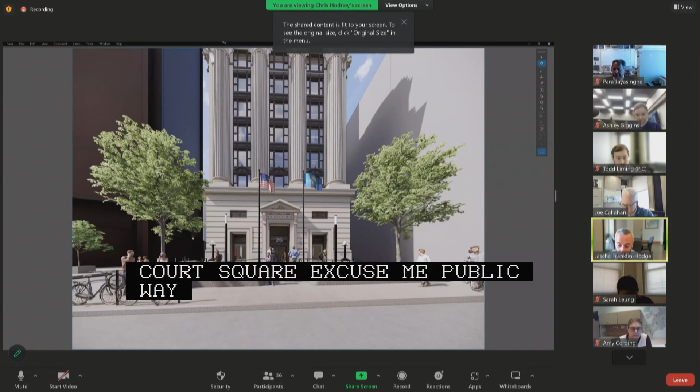So moved. On to our first public hearing of the day, a joint petition by the City of Boston Public Facilities Department and the Boston Redevelopment Authority, DBA Boston Planning and Development Agency, for the vertical discontinuance of a portion of Court Square, Public Way, Boston proper, located at the rear of 26 Court Street, generally northwest of City Hall Avenue, Pie Alley, vertically below the grade of the roadway.

It was new business on January 26th, as shown on a plan entitled City of Boston Public Works Department Engineering Division Vertical Discontinuance, Court Square, Downtown, one sheet dated August 25th, 2022. Would the proponents please introduce themselves, their affiliations, give a brief overview of the project, and then talk us through this specific item that you're proposing.

Good morning, Commissioners. I'm Gregory Rideout with the City of Boston Public Facilities Department. Here with me today is Chris Hodney from Nitsch Engineering, as well as representatives from Cambridge 7. On behalf of the city, we also have the Deputy Chief of Operations, Keith Williams, the Deputy Director of Public Facilities Department, Carlton Jones, and the Assistant Director of the Public Facilities Department, Dana DiMatteo. Public Facilities Department and our architect, Cambridge 7, and Nitsch Engineering are excited about making site improvements that highlight good urban design, accessibility, and lighting.

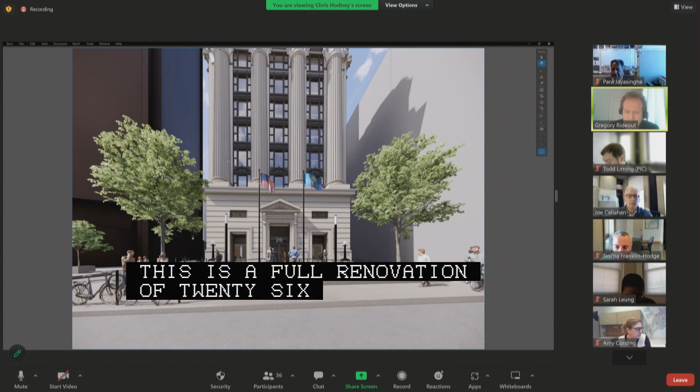The project is now providing a fully accessible pathway around the building. This is a full renovation of 26 Court Street, incorporating the offices of the Public Facilities Department, the Mayor's Office of Housing, and additional departments. The first floor features a welcoming lobby, constituent interaction spaces, a bid room, and a large public meeting room. We would like to thank our partners in departments across the city and in the downtown Boston Business Improvement District, all of whose input has made this an even better project.

Today the Boston Public Facilities Department comes before you with three requests. The first is regarding a vertical discontinuance, for which we are requesting approval. The second is regarding a pedestrian easement, for which we are requesting conditional approval. The third is some specific repairs, for which we are also requesting conditional approval. The approval and conditional approvals will allow the project team to obtain a long-form building project permit in a timely manner and allow us to maintain the construction schedule.

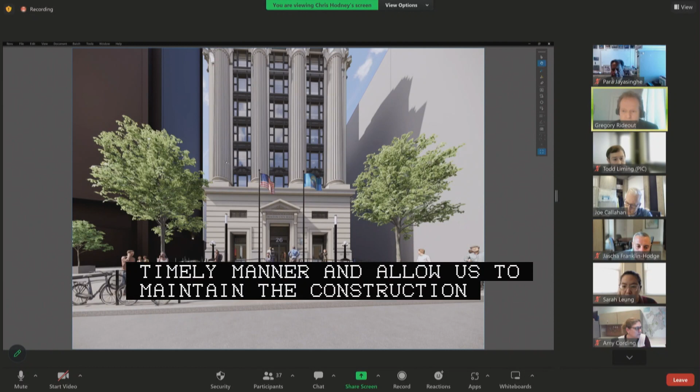Thank you, Commissioners, and we'll now turn it over to Mr. Hodney. So thanks, Greg. Morning, Chris Hodney with Nitsch Engineering, project manager on the project. So this is just a rendering showing the front of the building. The first action item today is this vertical discontinuance. Nothing has changed in this plan since we previously presented it at the prior hearing. There's an existing tunnel underneath Court Square, which connects Old City Hall, this building on the left, with the 26 Court Street building, which is our project.

It's been there for a number of years, but it was never actually discontinued out of the right-of-way, so this is an attempt to clean up this condition. I'll open up to questions.

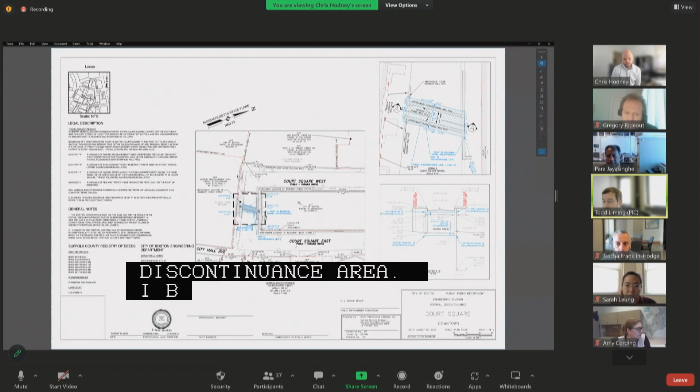Commissioners, any questions? Are there no utility easements or any other easements within that part? Todd, are there any private utility easements or anything within the area? No, not within the discontinuance area. I believe there might be some old utility lines that connect the two buildings, but those are all privately maintained. They might even be abandoned, I'm not sure, but no public utilities are impacted by this. Thank you, sir.

Any other questions from members of the commission? PIC staff or members of the public? We're all set with this, thank you.

All right, seeing no raised hands, do I hear a motion to approve public hearing number 1? I'll make a motion to approve a joint petition by the City of Boston Public Facilities Department and the Boston Redevelopment Authority for the vertical discontinuance of a portion of Court Square as read into the record by the chair.

Second. All in favor? Aye. Aye. Aye. Any opposed or abstain? I abstain due to direct involvement in the project. All right, well, I think we have a quorum, so the public hearing item passes, so moved.

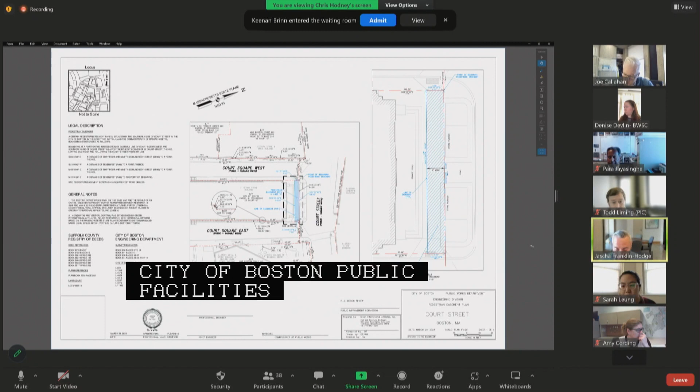On to public hearing number 2 on a petition by the City of Boston Public Facilities Department for the acceptance of a pedestrian easement adjacent to Court Street Public Way, Boston proper, located at address number 26 between Court Square East and Court Square West. New business from January 26th as shown on a plan entitled City of Boston Public Works Department, Engineering Division, Pedestrian Easement Plan, Court Street, Boston, one sheet dated March 29th, 2023.

Would the presenters please reintroduce themselves and their affiliations and then walk us through this business item. So good morning again, Chris Hodney, Project Manager with Nitsch Engineering, joined by Greg Rideout with the Public Facilities Department, as well as some members of the Cambridge 7, the architects.

This plan represents a pedestrian easement. This was actually requested at the prior hearing. So this pedestrian easement is along Court Street. It includes the 2 ramps which lead up to the main entrance. So you walk from the sidewalk up the ramps to get in, and this is just including those in the pedestrian easement.

Any questions or comments from the commission? PIC staff, members of the public? No, we appreciate the project team's quick turnaround on this plan. We do have some probably minor comments, but we can work on those offline before mylar plans are submitted. All right,

Seeing no other comments, do I hear a motion to approve public hearing number 2? I'll make a motion to approve a petition by the City of Boston Public Facilities Department for the acceptance of a pedestrian easement adjacent to Court Street as read into the record by the chair.

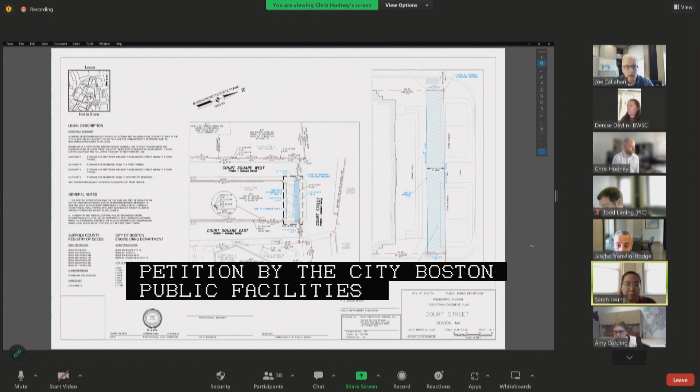Second. All in favor? Aye. Aye. Aye. Aye. Any opposed or abstain? I abstain due to direct involvement in the project.

All right, so moved. On to public hearing number 3 on a petition by the City of Boston Public Facilities Department for the making of specific repairs within the following public ways in Boston proper, consisting of curb realignment, roadway and sidewalk reconstruction, as well as new and relocated pedestrian ramps, street lighting infrastructure, storm drain infrastructure, hydrants, groundwater recharge wells, bike racks, bollards, electric vehicle charging stations, a raised crosswalk, and a rebuilt stairway.

Court Street at address number 26, generally between Washington Street and Tremont Street, Court Square southwest of Court Street. New business on January 26th as shown on a set of plans entitled City of Boston Public Works Department, Engineering Division, Specific Repairs Plan, Court Square, 26 Court Street, Boston, 5 sheets dated August 2022.

Would petitioners please reintroduce themselves and walk us through the details of this action? So good morning, Chris Hodney, Project Manager at Nitsch Engineering, joined by Greg Rideout of the Public Facilities Department, as well as some members of the Cambridge 7, the architects.

So this plan before you shows the proposed improvements, which are essentially the entire perimeter around the 26 Court Street building, which is in the center here. In addition to the items that you listed off, Mr. Chair,

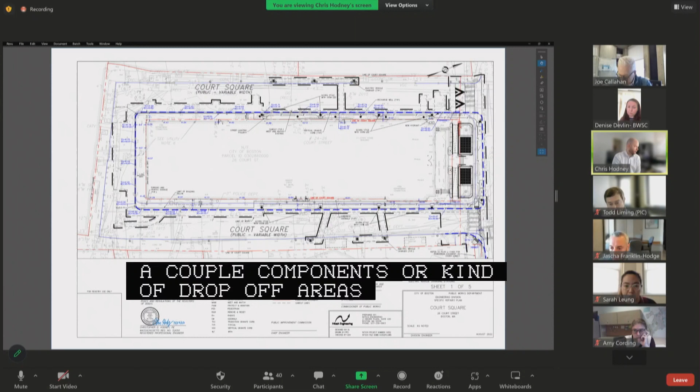We've made some revisions since the prior hearing. So those revisions include revising the curb on Court Square East. So we previously had a couple of bump outs or kind of drop off areas. I guess they were actually parking, but so some bump outs, which we've just straightened the curb out and eliminated parking on this side altogether. This allowed us to provide an ADA accessible sidewalk, as well as room for street lighting infrastructure.

This has been coordinated between BTD, Disabilities Commission, and street lighting over the past month or so. So I think we're in a pretty good place with where the sidewalk has ended up on this side of the street. We've also made some revisions just to street lighting around other parts of the building as well.

We originally had a single street light in the middle. This has been revised to have one on either side of the building, and then just mirroring on each side along Court Square West. And then just a couple of more minor items. There was a request to better show the extent of the foundation for the basement as it extends out below the sidewalk, below the building.

So we darkened that here, calling out the limits of building below. You can see that it extends out beneath the sidewalk on Court Square East, Court Square South, and Court Square West. We've also called out, at staff request, the existing pedestrian easement in front of 1 Boston Place, which is running through this. This is showing the front.

We've really made minor changes here, just the street lights more than anything else, and calling out the existing pedestrian easement. You can also note, for context, the pedestrian easement which was just approved contains the two ramps leading up to the building. So I'll open it up to any questions you might have.

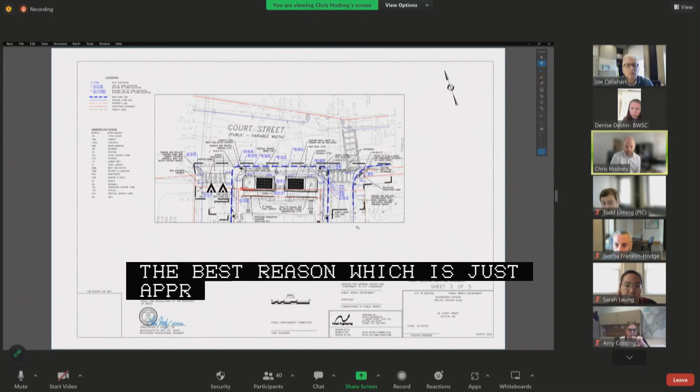Commissioners? Good morning. Okay, Amy. I know we recently moved all that parking on the other side, and part of that was discussion about the potential for a crosswalk at the back of this building, Court Square South. We would need ramps if there's going to be a crosswalk there. I want it where Sarah wants it, but if we're going to have a crosswalk at the back of the building, we need some ramps.

Gregory Rideout, Boston Public Facilities Department. Public Facilities Department had a conversation with Commissioner McCosh and her team, and they have waived the requirement for a crosswalk at the south. Sarah Leung can address that more specifically.

Yes, in conversation with Commissioner McCosh, we wanted to prioritize the sidewalk improvements here and maybe revisit to allow for a crosswalk in the future. But for this project and the timeline schedule, we did want to prioritize these sidewalk improvements. We want to thank the project team for coordinating with our office as well as other city departments to get an accessible sidewalk on the building side as well.

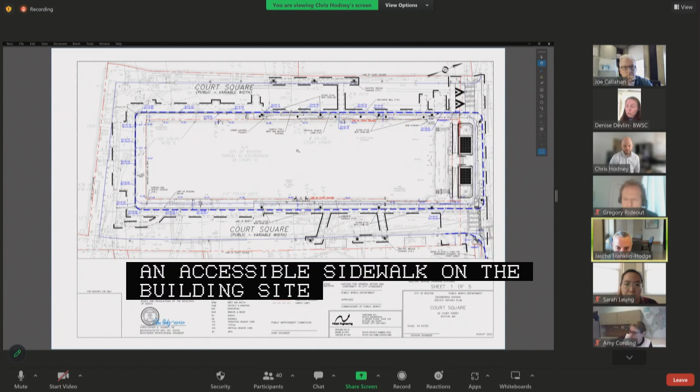Commissioners, other questions, comments? Oh yes, just a comment on the drainage. On the final plans, if you could show any proposed drainage improvements, just the structures or any kind of abandonment of structures like catch basins, anything in the public way, that'd be great. Thank you.

Commissioners? I will say first, appreciation on behalf of the Street Lighting Division to the project team for working through the various lighting scenarios for Court Square with us. We were very happy with how this landed, and the ability to use our standard street lighting infrastructure in this location is much appreciated.

Question about maintenance. What is the expectation for which of these project elements will be maintained by the proponents rather than by the Public Works Department? And where are we in terms of establishing an LMI for the maintenance responsibility of anything that will be maintained by the Public Facilities Department?

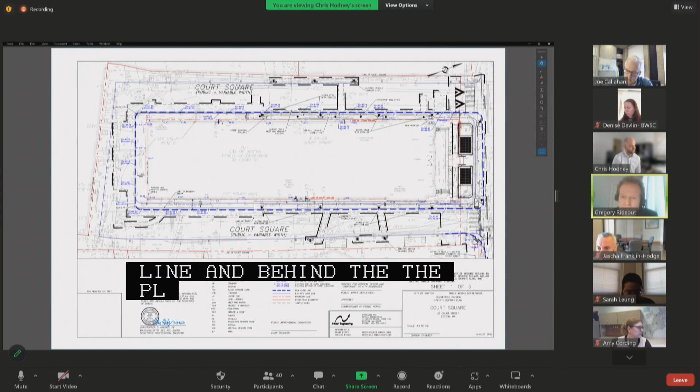Gregory Rideout, Boston Public Facilities Department. The items that fall within the building property will be the responsibility of the Property Management Department to maintain. In the front of the building, the line behind the planters is the property line, with the pedestrian easement there for the ramp, so anything falling behind that line of the planters. As for the stairs between the planters, I anticipate those will also be maintained by the Property Management Department as part of an agreement. The lighting we are placing on the facade of our building will also be maintained by Property Management.

As for the sidewalk that is outboard of the planters at Court Street, that will be maintained by Public Works. As for the sidewalk around the building, I believe it will depend on whether or not there is a hollow sidewalk underneath. If there's a hollow sidewalk underneath, that will fall under the responsibility of the owner or Property Management. Where there is not a hollow sidewalk underneath and it is within the public way, it will fall within the responsibility of Public Works. That is the Public Facilities Department's understanding, and I'll leave it to Todd if he wants to add to that.

Can I ask also about the bollards and EV chargers? On the EV chargers, there has been a fair amount of coordination between the Environment Department, Fleet Management at Public Works, Property Management at Public Facilities, and also the Budget Office.

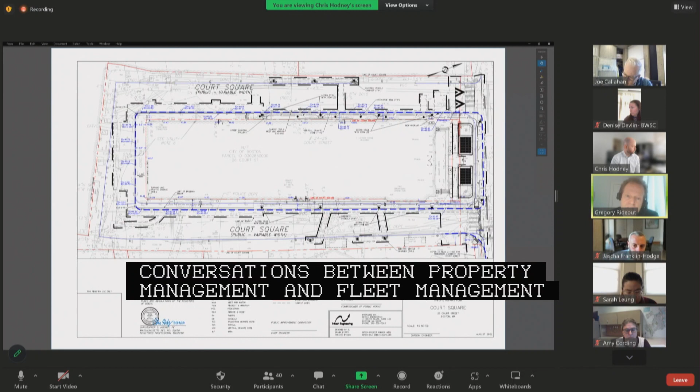As far as the maintenance of the electric vehicle chargers, I believe there needs to be further conversation between Property Management and Fleet Management as to the precise responsibility for managing them. However, there is interdepartmental agreement that these chargers will be for the exclusive use of city-owned vehicles to help meet the city's climate goals.

Got it. And the recharge wells? The recharge wells are part of the city's review with the Boston Water and Sewer Commission, and Nitsch Engineering has coordinated a site plan review and approval with them. The recharge wells feed into a tank in the basement of 26 Court Street. I believe maintenance falls upon the owner, but I'll let Chris Hodney speak to that. Yeah, typically that would be ownership responsibility, so I'd anticipate that's 26 Court Street property management's responsibility.

So we'll continue to look for future conversation on the EV chargers, given that they are an asset for which there are a lot of stakeholders, as you correctly noted. Happy to be part of finalizing that conversation about responsibilities there.

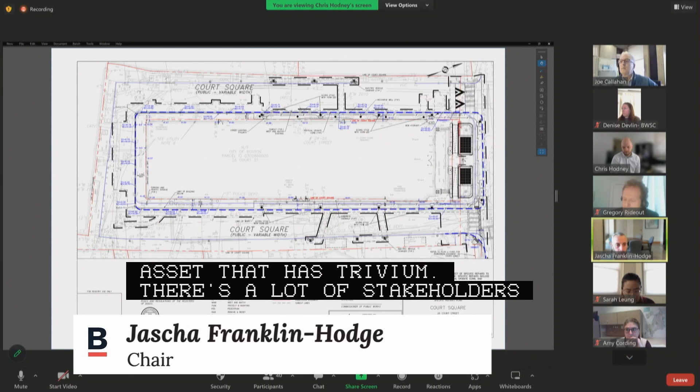Todd, is there anything else from an LMI perspective that you wanted to make sure we covered? No, I think that was it.

The bollards, I think, probably belong to Property Management. Those don't look like standard Public Works bollards, but everything else that Greg and Chris mentioned seems to fit the LMI. I believe Chris added the extents of the hollow sidewalks to the PIC plan, so it should be pretty easy to recognize which sidewalks are the maintenance responsibility of the project versus Public Works. That should be fine. Great.

Any last questions, comments from commissioners? PIC staff, members of the public?

Mr. Chairman, if I may. Yeah, of course, go right ahead, Keith. Keith Williams, Deputy Chief of Operations, Operations Cabinet, Mayor's Office. On behalf of Chief Dion Irish, I'd like to express strong support for these petitions by PFD. As you know, 26 Court Street is a high priority project for the Cabinet administration, and a lot of hard work and diligence has gone into this. So on behalf of the chief, I'd like to speak in support of these petitions. Thank you.

Thank you, Keith. Todd, any further final comments? No, just want to thank the project team. There was a lot of coordination that went into this. We appreciate their diligence. Yes, indeed, I will echo that.

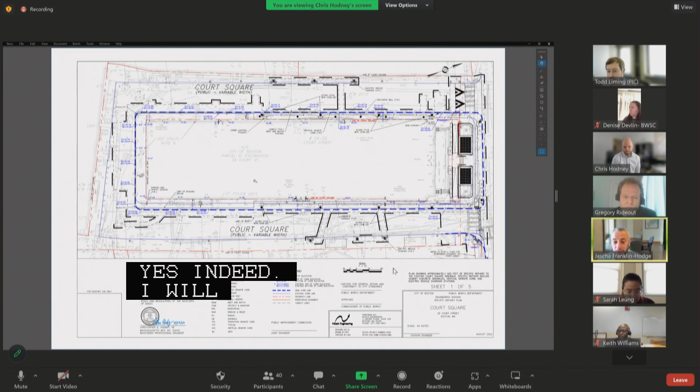So with that, do I hear a motion to approve public hearing number 3? I'll make a motion to approve a petition by the City of Boston Public Facilities Department for the making of specific repairs within Court Street and Court Squares, read into the record by the chair. Second. All in favor? Aye. Aye. One abstention for the record, just due to direct involvement with the project. Got it, no other abstentions or votes in opposition? All right, so moved. Thank you very much. Thank you. Public Facilities Department would like to thank the PIC staff and the commissioners.

Thank you. Thanks, Greg. All right, on to public hearing number 4, on a petition by the City of Boston Public Works Department for the making of specific repairs within the following public ways in Dorchester, consisting of curb realignment, roadway and sidewalk reconstruction, new and relocated pedestrian ramps, specialty pavement, street lighting infrastructure, storm drain infrastructure, street trees, and driveway curb cuts: River Street generally between Southmere Road and Meadowbank Avenue, Leah Haven Road between River Street and Meadowbank Avenue, Ledgebrook Road between River Street and Meadowbank Avenue from River Street to a point west of Ledgebrook Road, Southmere Road between River Street and Ledgebrook Road, and Newcroft Circle north of River Street.

This was new business on March 16th, 2023, as shown on a set of plans entitled City of Boston Public Works Department Engineering Division Specific Repairs Plans, River Street Neighborhood, Leah Haven Road, Ledgebrook Road, Meadowbank Avenue, Southmere Road, Newcroft Circle, Mattapan, 11 sheets dated March 30th, 2023.

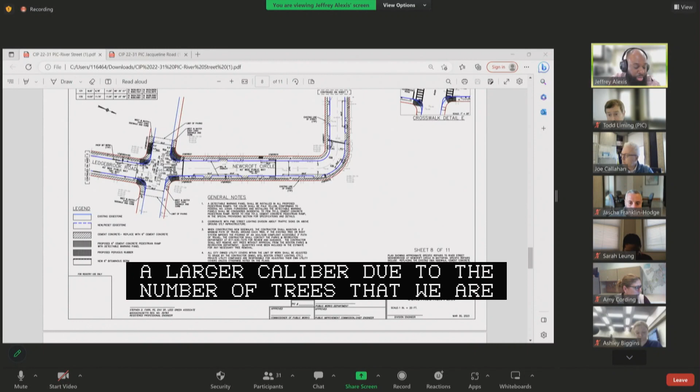There was a request to propose a larger caliper due to the number of dead trees that we were removing as part of this project. We have been coordinating with the Parks Department. The request was to propose a larger caliper, whether it be 3 inches or 4 inches.

In regards to that, we did reach out to Parks, and they did have some concerns in regards to proposing a larger caliper within the 3 foot or 3.5 foot grass strip. The 2.5 inch caliper tree root ball is roughly 26 to 28 inches in diameter, which would only leave approximately 5 inches of space on each side for installation into the planting strip.

And if they were to install a 3-inch caliper tree, the root ball would average 36 inches in diameter, which wouldn't leave enough room for the plant to be properly planted in those grass strips. So they did have concerns in regards to that, which is why they felt that proposing a 2.5-inch caliper would be the largest we should propose as part of these improvements.

The other issue that was raised was in regards to the porous asphalt berm. The Parks Department also felt that there wasn't much benefit to using the porous asphalt berm compared to a standard asphalt berm for this application, as they felt the water would never have the ability to permeate through the berm if it was running down the curb line to drain anyway.

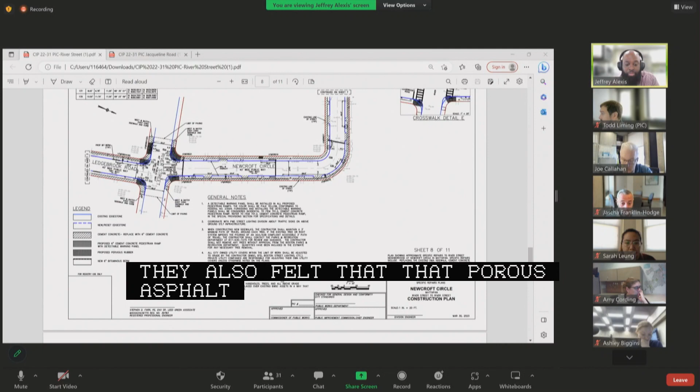We also reached out to our design consultant to get their opinion on whether we should propose this or not. They also felt there weren't really much benefits to proposing the porous asphalt at the curb line. Porous pavement provides excellent infiltration when used as a horizontal surface where water can infiltrate vertically via gravity. There were concerns about the permeability of the porous berm being reduced.

Due to gutter line collection of road sand, salt, and other debris that continuously collects in the gutter, there was also a concern about the lack of strength and durability of a porous pavement berm used for curb. Because of the void structure and permeability, the asphalt is severely weakened, so with plows hitting against it, they had concerns that the durability wouldn't be adequate for us to propose it for this application.

I think that's the last thing we had in regards to the trees. In regards to these plans, for PIC, they changed slightly, but the improvements we're proposing as part of this project are not changing. We are maintaining all the improvements.

The last issue requested as part of these improvements was the crossings we're proposing at Ledgebrook, the new crossings across River Street. This is one of them here, and the other is at Meadowbank Avenue. We reached out to BTD to figure out what we can do to enhance these crossings, but they mentioned that proposing any enhancements would require significant improvements to River Street, which goes beyond the scope of this project.

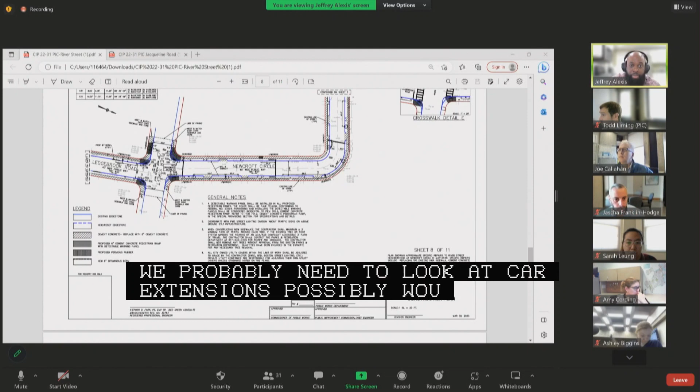We probably need to look at curb extensions, possibly if we'd want to propose an RRFB, the minimum would be to propose a curb extension along this corridor. We're happy to take a look at River Street as a whole in a holistic view in the future, but as part of this project, which is mainly focused on keeping residential streets in a state of good repair and providing that access, they ultimately determined that crosswalk signs were sufficient at this time.

Any questions on this one? Commissioners, questions? PIC staff, members of the public? No, we're all set. Thank you, Jeff, for your plan updates. Thank you very much for addressing all those issues from the last hearing.

Hearing no other questions or comments, do I hear a motion to approve public hearing number 4? I make a motion to approve a petition by the City of Boston Public Works Department for the making of specific repairs in River Street, Leah Haven Road, Ledgebrook Road, Meadowbank Avenue, Southmere Road, and Newcroft Circle, as read into the record by the chair. Second.

All in favor? Aye. Aye. Aye. Any opposed or abstain? So moved. Thank you very much. And thank you, Jeff.

On to public hearing number 5, on a petition by the City of Boston Public Works Department for the making of specific repairs within the following public ways in Jamaica Plain, consisting of curb realignment, roadway and sidewalk reconstruction, as well as new and relocated pedestrian ramps, street lighting infrastructure, and driveway curb cuts: Jacqueline Road between Ansonia Road and Birchland Avenue, Ansonia Road generally at Jacqueline Road, Birchland Avenue generally at Jacqueline Road. New business on March 16th, as shown on a set of plans entitled City of Boston Public Works Department Engineering Division, Specific Repairs Plans, Jacqueline Road, West Roxbury, 3 sheets dated March 16th, 2023.

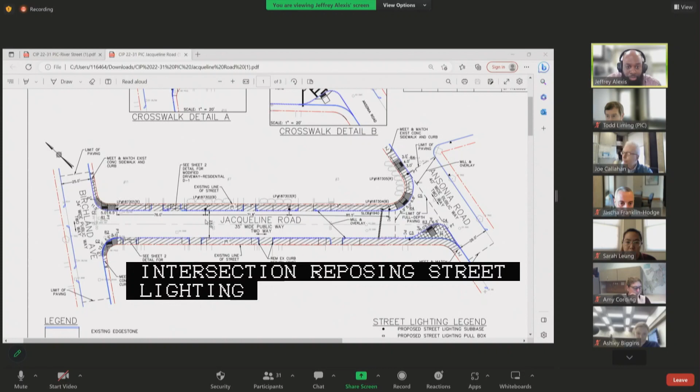No changes or updates were made to these plans as of new business. We are maintaining our existing design. I'm proposing a crossing along Jacqueline Road, as well as improved crossings at the Ansonia Road intersection. We're proposing street lighting as part of this project. Jacqueline Road is a substandard 23-foot roadway. We are restricting parking on the northern side, which is essentially something the residents were doing anyway. They were just self-regulating because they didn't have the ability to go up and down the street and pass without parking only on one side.

One of the questions we received as part of new business was in regards to Birchland Ave and the improvements that street also needs. We are looking at Birchland Ave, and we've added it to our backlog in terms of reconstruction for this program because it's a residential street, and we'll be looking at prioritizing it in our program in the future. But no other updates on Jacqueline Road.

Thank you. Any questions? Thank you, Jeff. Commissioners? PIC staff, members of the public? We're all set. All right, excellent.

Do I hear a motion to approve public hearing number 5? I'll make a motion to approve a petition by the City of Boston Public Works Department for the making of specific repairs in Jacqueline Road, Ansonia Road, and Birchland Avenue as read into the record by the chair. Second. All in favor? Aye. Aye. Aye. Any opposed or abstain?

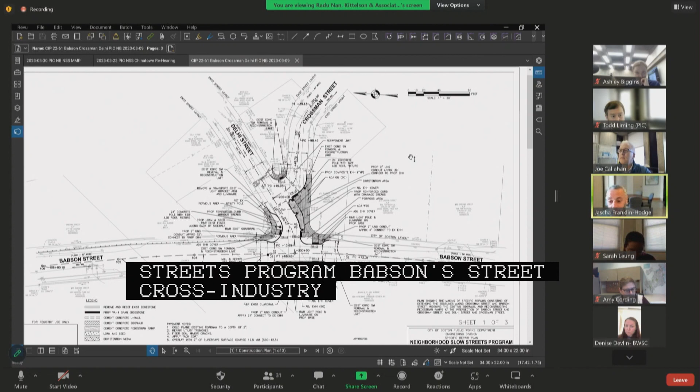This is new business from March 16th, as shown on a set of plans entitled City of Boston Public Works Department Engineering Division, Specific Repair Plan, Neighborhood Slow Streets Program, Babson Street, Crossman Street, Delhi Street, Mattapan, 3 sheets dated March 3rd, 2023. Proponents, please introduce yourselves, your affiliations, give us a brief overview of the scope of the project and any updates since your last hearing.

Good morning, Chair and members of the Commission. I'm Radu Nan with Kittelson Associates, supporting Boston BTD and Public Works Department. In front of you is the plan for specific repairs to improve the accessibility and walking paths for people in the neighborhood just east of this intersection between Crossman and Babson.

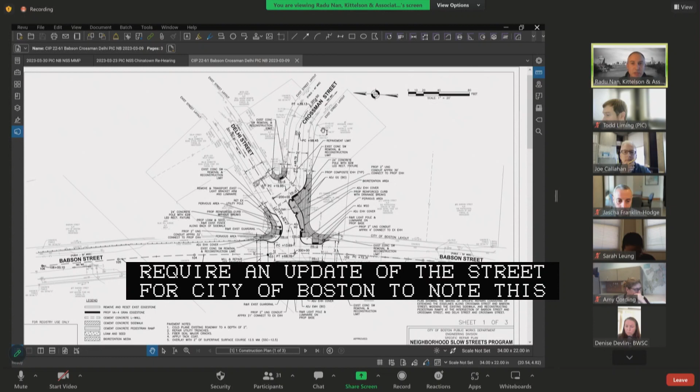The realignment of the edge lines reconfigures the intersection for Crossman Street to tee into Delhi Street, and then Delhi Street continuing to Babson Street. This will require an update of the street book for City of Boston to note this new configuration. The reconfiguration provides a more predictable travel pattern from Crossman Street to Babson Street.

Crossman Street today is required to stop for traffic approaching from Delhi, and then further down, Delhi Street traffic stops at Babson. The addition of the pedestrian ramps provides enhanced visibility and a clear crossing of Babson Street at Delhi Street, or Crossman Street today.

An additional space within the intersection that is not used for pedestrian travel path is being built as pervious, or as a bioswale, to allow stormwater to infiltrate or travel through before rejoining the existing flow patterns that use the existing catch basins along Crossman Street and Babson Street.

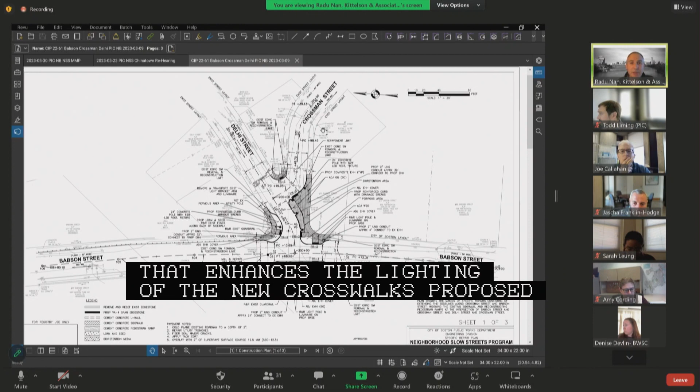In addition to the sidewalk, pedestrian ramps, and edgeline improvements, the project adds new streetlights, or relocates them, in a position that enhances the lighting of the new crosswalks proposed across Delhi Street and Babson Street. No changes have been made to these plans from the plans that were shown in the new business hearing. With that, I'll entertain any questions.

Thanks, Radu. Questions from commissioners? Good morning, Radu. We had a concern out in front of 72 Babson Street. You have the adjusted sewer manhole. We have a concern with that manhole being in the bio retention area. One of the details that was sent in the previous submittal, the cover doesn't look like it's flush with the surface. So I don't know if we're okay with the petition going through today, but maybe after the meeting we can have a conversation and discussion about that.

We'll be happy to, yes. Okay, thank you.

Any other questions or comments from commissioners, PIC staff, or members of the public? All set. All right, do I hear a motion to approve public hearing number 6?

I'll make a motion to approve a joint petition by the City of Boston Transportation Department and the City of Boston Public Works Department for the making of specific repairs in Babson Street, Crossman Street, and Delhi Street as written in the record by the chair. Second. All in favor? Aye. Aye. Any opposed or abstain? So moved. Thank you very much.

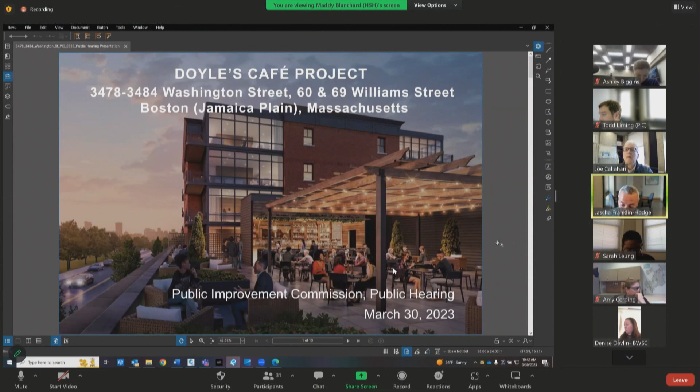Thank you. All right, now that we are through the City of Boston portion of our public hearing agenda, we can go on to public hearing number 7 on a petition by Watermark Development Incorporated for the acceptance of pedestrian easements adjacent to the following public ways in Jamaica Plain: Gartland Street on its southwesterly side at the side of 3478 to 3484 Washington Street, southeast of Washington Street; William Street on its southwesterly side at address number 69, southeast of Meehan Street; Meehan Street on its easterly side, south of William Street.

This was new business on March 16th, as shown on 2 plans entitled City of Boston Public Works Department Engineering Division Pedestrian Easement Plan, Gartland Street, Jamaica Plain, 1 sheet dated March 10th, 2023, and City of Boston Public Works Department Engineering Division Pedestrian Easement Plan, William Street and Meehan Street, Jamaica Plain, 1 sheet dated March 10th, 2023. Would the proponents please introduce themselves, give us a brief reintroduction to the scope of work being proposed here, and then walk us through this specific PICA action.

Good morning. James Downing, Howard Stein Hudson. We're the project engineers. I'm joined this morning by Lee Goodman from Watermark Development, who is the petitioner, and also by Maddy Blanchard from Howard Stein Hudson.

Here to present the plans associated with the 3478 Washington Street development, and also the 60 and 69 William Street project. Here's an aerial overview of the project.

There will be a total of 3 buildings built in 2 areas. The first 2 buildings will be built on Washington Street and Williams, between Gartland Street and William Street. The 3rd building will be built at the intersection of Meehan and William Street. Next slide. Here's an aerial view of the 3 buildings laid out.

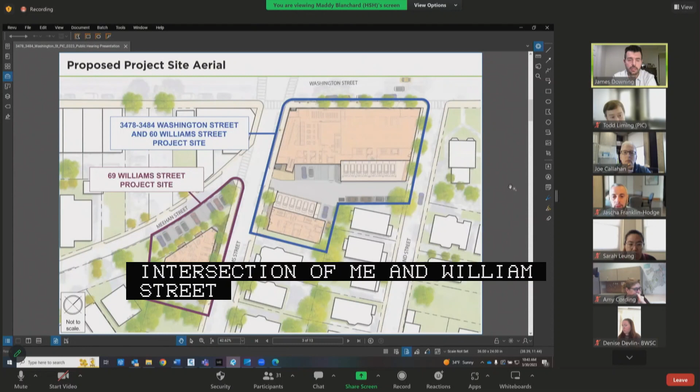The 3478 Washington Street building will have the Doyle's Cafe and also a grocery store on the ground level, above which there will be a 4-story residential building consisting of 16 units. There will also be some off-street covered parking in the rear for restaurant cores and for shoppers.

To the south of that building, at 60 William Street, is a 4-story residential building that will have 7 units, with off-street parking for that building as well. Lastly, the 3rd building is located across William Street at the intersection of William and Meehan, a 3-story residential building with 6 units and off-street parking.

Next slide. We've got a couple of sites here showing some of the existing conditions and some of the proposed renderings for the buildings. This is the existing Doyle's Cafe at the intersection of Washington and Williams. Here's the proposed development. Again, you can see Doyle's Cafe on the ground floor with that urban grocery store, above which we have the 4-story residential building.

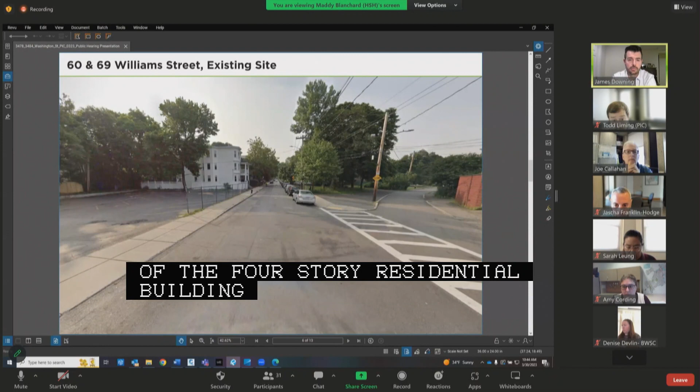And then this is the view down William Street. The development at 60 Williams will be built on the left-hand side in that vacant parking lot. And then on the right-hand side, 69 William Street will be built at the corner between that utility pole and that silver car. Again, here's a rendering of those two buildings.

On the left-hand side, that gray-blue building with the 6 balconies is the 60 William Street building. Then across the street on the right-hand side, the 3-story red brick building is the 69 William Street project.

As a result of the project, the applicant is seeking to grant the City of Boston a pedestrian easement along Gartland Street, associated with the Washington Street development. The pedestrian easement would extend for approximately 122 feet in a southerly direction from Washington Street, approximately 3.5 feet wide, for a total area of 429 square feet. Next slide, please.

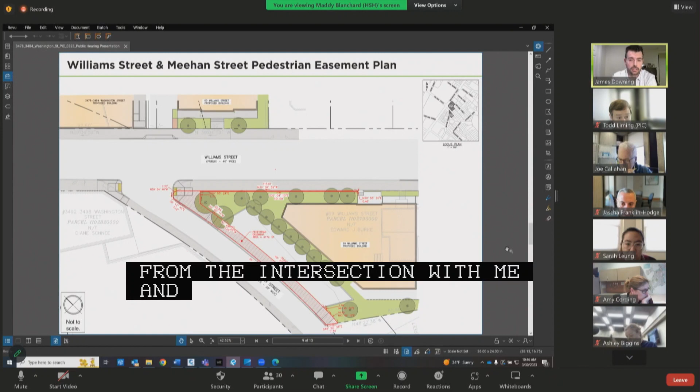I'm happy to answer any questions the commission members or public may have.

Thank you very much, James. Have there been any modifications to these plans since your prior hearing? There have been no modifications to these plans.

Excellent. Commissioners, any questions or comments? PIC staff, members of the public? No, we're good with this.

Thank you. All right. Do I hear a motion to approve public hearing number 7? Make a motion to approve a petition by Watermark Development for the acceptance of pedestrian easements adjacent to Gartland Street, William Street, and Meehan Street as read in the record by the chair. Second. All in favor? Aye. Aye. Aye. Any opposed or abstain?

So moved. On to public hearing number 8, on a petition by Watermark Development Incorporated for the making of specific repairs within the following public ways in Jamaica Plain, consisting of curb realignment, sidewalk reconstruction with structural soil, as well as new and relocated pedestrian ramps, specialty pavement, traffic signal infrastructure, street lighting infrastructure, street trees, landscaping, and driveway curb cuts. Washington Street, generally at address numbers 3478 and 3484 between William Street and Gartland Street. Gartland Street southeast of Washington Street, William Street generally at address numbers 60 and 69 from Washington Street to a point southeast of Meehan Street south of William Street.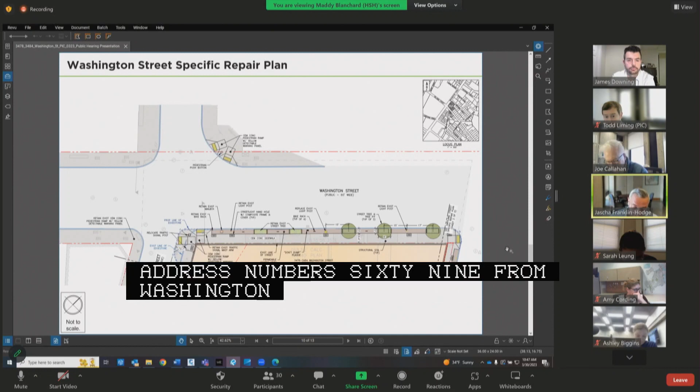New business from March 16th, as shown on a set of plans entitled City of Boston Public Works Department Engineering Division Specific Repairs Plan, Washington Street, William Street, Meehan Street, and Gartland Street, 3478 to 3484 Washington Street, 60 William Street, and 69 William Street, Jamaica Plain, 5 sheets dated March 10th, 2023. Would the proponents please reintroduce themselves, give us a brief reintroduction to this specific action, and any updates on questions you heard or changes to the plan since last meeting.

Morning. James Downing, Howard Stein Hudson, project engineers, joined by Lee Goodman from Watermark Development, the petitioner, and also by Maddy Blanchard from Howard Stein Hudson, here to present the specific repair plans associated with the development at 3478 Washington Street and 60 and 69 William Street.

As a result of the project at 3478 Washington Street, we put together a specific repair plan. Improvements within the public right-of-way will include separation of the apex ramp on the corner of William and Washington Street, relocation of an existing traffic signal post, and along the frontage of the building, the planting of 3 new street trees, bike racks, and reconstruction of a brand new cement concrete sidewalk.

Across the street, the proponent is also seeking to separate the apex ramp on that side of the street and incorporate a new pedestrian push button. Next slide, please.

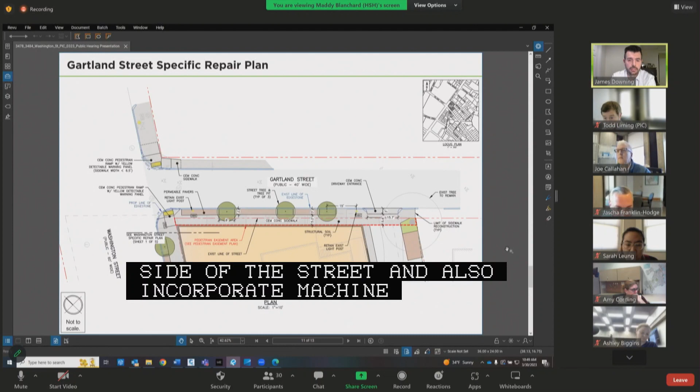Similarly, as a result of the proposed project, the applicant is seeking to make improvements within Gartland Street. These would include curb realignment, ramp reconstruction, installation of 3 new street trees, and some porous pavers in the furnishing zone, and modification to an existing curb cut.

Lastly, as a result of the project at 69 William Street, the applicant is seeking to make modifications on the public right-of-way that would include new curb realignment, the reconstruction of 2 new pedestrian ramps, and the widening of the sidewalk along the south side of William Street. With that, happy to answer any questions the commission or public may have.

Thank you, James. I believe there was a question from the last hearing about the potential for introducing more permeable or green surfaces within the public right-of-way here. I'm wondering if you have any updates about that, and whether there's been any ability to identify places where that might be appropriate.

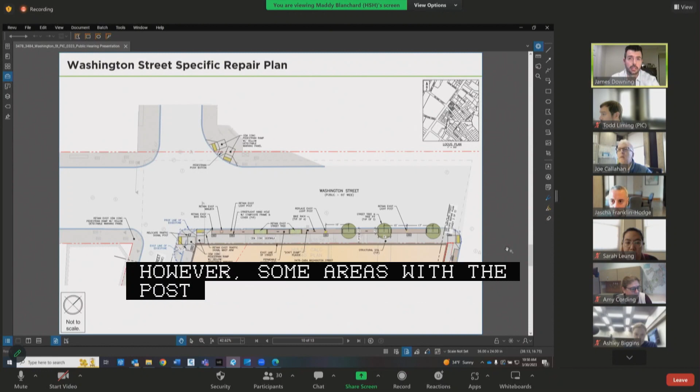Yes, that is correct. We did receive some comments and have looked at some of them. We did not agree with all of them. However, in some areas where porous pavers are currently shown on this plan for Washington Street, we are looking to set up a meeting early next week with Kate England, the PIC staff, and the design team and landscape architect to see if we can install, or swap out some of the porous pavers for some green infrastructure.

Okay, excellent. So it would not affect the dimensions or anything like that associated with the specific repair plan. All right, excellent. Appreciate that willingness to continue that line of conversation, and certainly the PIC can accept those kinds of minor modifications after a vote.

So, commissioners, other comments or questions? PIC staff, members of the public — no, we can be part of those conversations with Kate England. I think ultimately, if anything changes, it would just be permeable pavement becoming some sort of green infrastructure, so we're not going to be changing accessibility or anything like that, but we can have that conversation offline.

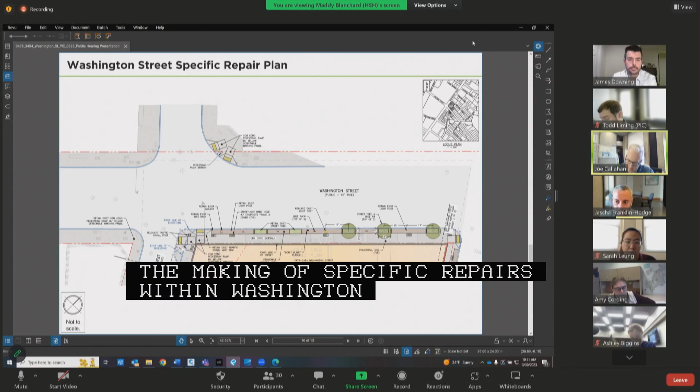Great, seeing no other questions, do I hear a motion to approve public hearing number 8? I'll make a motion to approve a petition by Watermark Development for the making of specific repairs within Washington Street, Gartland Street, William Street, and Meehan Street as read in the record by the chair. Second. All in favor? Aye. Aye. Aye. Any opposed or abstain? So moved, thank you very much.

On to public hearing number 9, on a joint petition by LPB Albany LLC and the Boston Redevelopment Authority, DBA Boston Planning and Development Agency, for the vertical discontinuance of portions of the following public ways in Boston proper, vertically above the grades of the sidewalks: Albany Street on its northwesterly side at address number 595, northeast of East Canton Street; East Canton Street on its northeasterly side between Albany Street and Thorne Street. New business on March 16th, as shown on a plan entitled City of Boston Public Works Department Engineering Division, Vertical Discontinuance Plan, 595 Albany Street, East Canton Street, Boston Proper, one sheet dated December 2nd, 2022.

Proponents, please introduce yourselves, your affiliations, and give us a quick review of the project, and let us know the status of this and whether there's been any changes or comments since your last hearing on this action. Yes, good morning, Mr. Chair, members of the Commission. Mark Lacasse, Lacasse Law, 75 Arlington Street in Boston. I am the attorney for the proponent, LPB Albany LLC.

With respect to the vertical discontinuance, which is on a joint petition with BPDA, today we are requesting a continuance of this hearing to April 27th on the basis that following the BPDA board's order of taking on February 16th, BPDA staff didn't record the actual order of taking itself within the 30-day statutory period. So we need to go back to the BPDA board at their April hearing for reauthorization of the taking, at which time we will then promptly record it and be able to appear back before this commission on April 27th. But otherwise, there have been no changes to the vertical discontinuance as shown to you at the new business hearing.

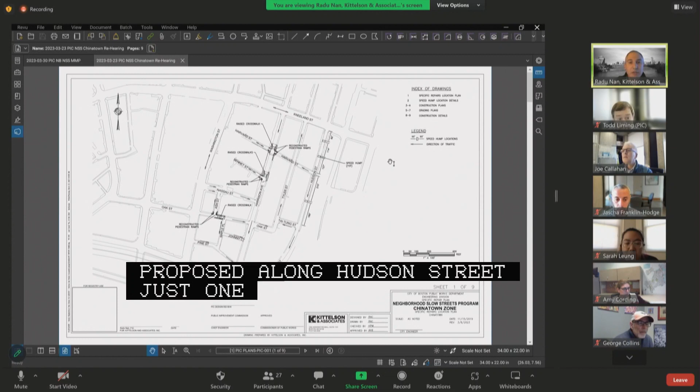In front of you, there's also 3 speed humps that were proposed along Hudson Street. Just 1 speed hump, minor adjustment in terms of address number that was recorded during the previous hearing for this neighborhood. So with that, I will focus your attention on the changes now requested along Harrison Avenue at Bennet Street.

The changes here involve realignment of the edge lines, reconstruction of sidewalks, reconstruction of pedestrian ramps, installation of a raised crosswalk, and new storm drain infrastructure, relocation of a water line to accommodate the installation of the raised crosswalk north of Bennet Street along Harrison Avenue. The changes made to the design include the extension of the sidewalks towards the roadway. This reinforces the no parking area along or near the raised crosswalk, but also allows the raised crosswalk to be closer to the intersection and be placed at a location that is better aligned with the walking path for people crossing the roadway at this intersection.

I think those are all the details.

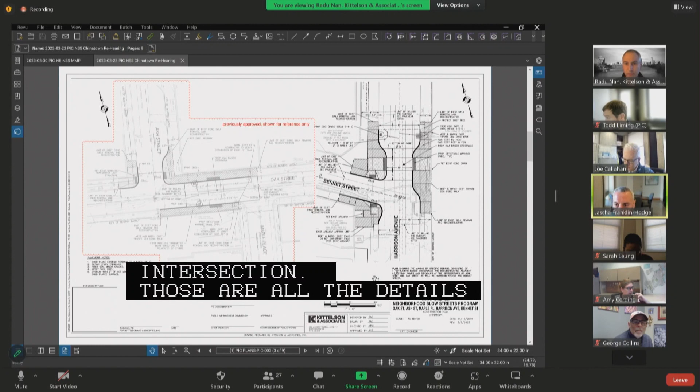Is this the only sheet, or are there additional? There's one more location, yes. So this is the sheet for Harrison and Bennet. The next location is Harrison and Harvard.

The east side of Harvard Street is a public right-of-way. The west side of Harvard Street is a private way. The changes identified on this plan include realignment of the edge lines along Harrison Avenue, reconstruction of the sidewalk, reconstruction of pedestrian ramps, relocation of street lighting and repairs to the street lighting conduit, replanting of trees in existing tree wells where the existing trees have died and been removed, and changes to storm drain infrastructure to allow for construction of the raised crosswalk on the north side of Harrison Avenue, north of Harvard Street.

Reconfiguration of one storm drain inlet, again to promote proper drainage south of the raised crosswalk. The changes to the edge line alignments allow for the location of this raised crosswalk to be closer to Harvard Street, on the north leg of Harrison Avenue, which is better aligned with the walking pathways and better aligned with the walking path along Harvard Street.

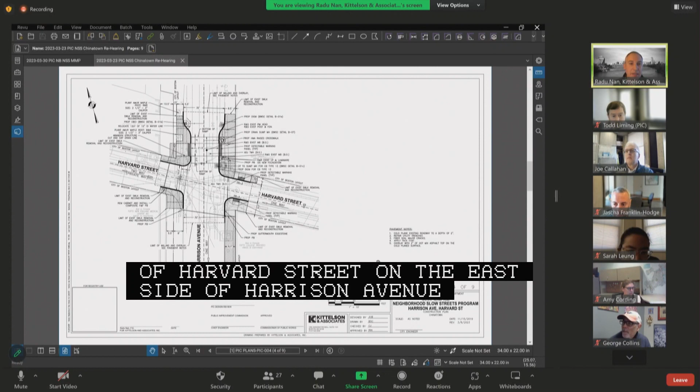Changes also include building a commercial driveway in the public right-of-way as an entrance to the private side of Harvard Street on the east side of Harrison Avenue. Those are the changes proposed at this location, and these are the last changes for the plans in front of you today.

Thank you, Radu. Commissioners, questions, comments? Radu, can you go back to sheet 3 of 9, please?

You have a red color box saying previously approved, shown for reference only. Yes. I'm a little bit disconnected because on that sheet you show Ash Street, Maple, and Oak, and I'm having difficulty connecting that as a point of reference to Bennett and Harrison. Did I miss something? No, it was shown because it was part of the previous discussion for the whole neighborhood.

In future plans, we'll remove this sheet altogether since it has been previously approved and is already recorded on L plans. So for this hearing, the notation previously approved, shown for reference, has no relevance to the improvements you're speaking for at Bennett and or Harrison. Is that correct? That is correct, yes.

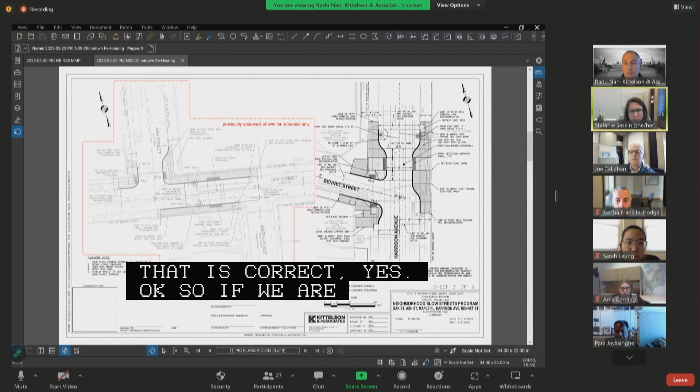Okay, so if you are going to show something that was previously approved, you may want to show the previously approved parts for Bennett and Harrison. Yes, maybe? Bennett and Harrison needed to be redesigned once Boston Water and Sewer had completed their work on Harrison Avenue. So the previously approved plans for that location had to be completely changed, which is why we're back.

No, Stefanie, it's just that the way it is being proposed right now, shown right now, doesn't make... I don't know why we included all of the other stuff that we had already gone through four years ago. I agree. All of that will be removed. I approve it. I agree with both of you.

We'll remove this from future plans brought in front of the commission. Clean it up, because when we file these things, we may not cross-reference, and PIC staff, if you could cross-reference these new issues to the recordings we have done in the past. That way, when someone does a search, it'll be connected. Thank you so much. We'll work with the project team to make sure everything is referenced appropriately.

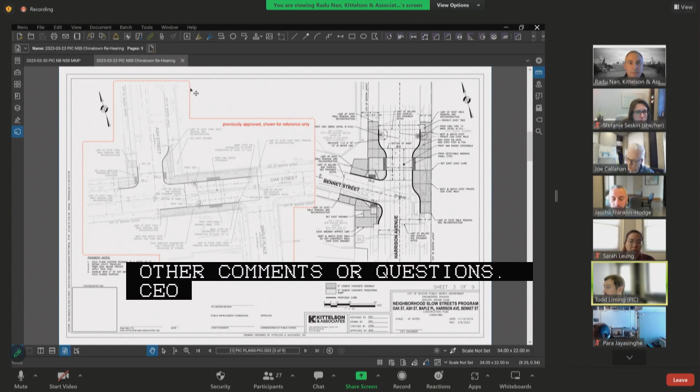Commissioners, other comments or questions? Okay, I see staff or members of the public. Nope, other than those plan updates, we're all set. Will you be ready for your public hearing on April 13th? Yes. All right, excellent. We'll see you back with this in two weeks.

On to new business number 2: Moreland Street, Mount Pleasant Avenue, Whiting Street, Montrose Street, Copeland Street, Perrin Street, Dunreath Street, Winthrop Street, Fairland Street, Forest Street, Greenville Street, Aspen Street, Alaska Street, Waverly Street, Langford Park, Dudley Street, Roxbury - specific repairs on a joint petition by the City of Boston Transportation Department and the City of Boston Public Works Department. Would petitioners please reintroduce themselves and give us an overview of what's being proposed here.

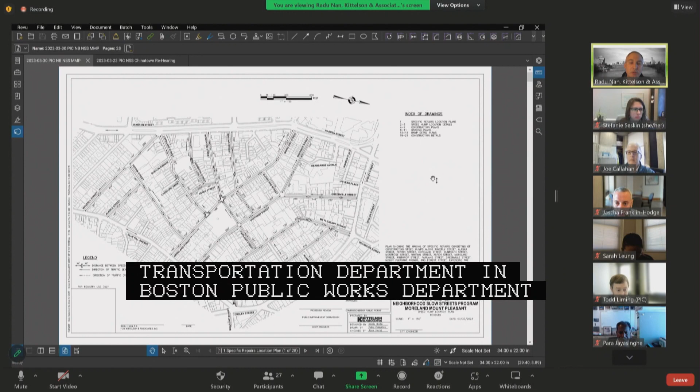Good morning, Chair, members of the Commission. My name is Radu Nan with Kittelson & Associates, in support of Boston Transportation Department and Boston Public Works Department. In front of you is a neighborhood plan to promote safer travel within this area, generally bounded by Warren Street, Dudley Street, Blue Hill Avenue, and Waverly Street. These interior streets are going to be signed and marked for a speed limit of 20 miles an hour in order to promote this general slower travel speed.

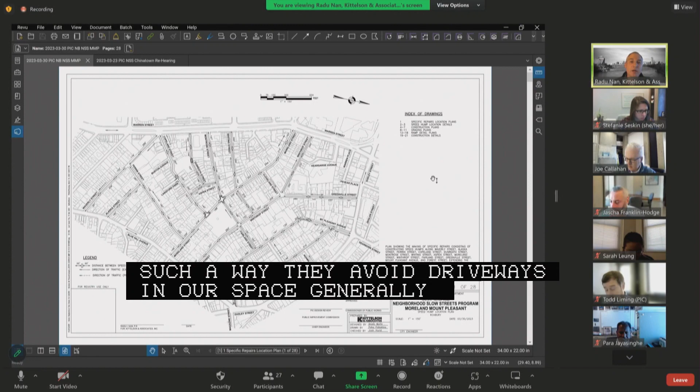We're proposing installing 51 total speed humps within the network of streets in front of you, and read into the record: these speed humps were located in the field in areas that do not conflict with existing utility features such as water castings, manholes, water valves, and such. They're also located in such a way that they avoid driveways and are spaced generally between 150 and 250 feet, to promote that uniform 20-mile-an-hour speed we're aiming for within this area.

This is a general map of all of the speed humps. The following sheets include more detailed locations of each individual speed hump. I will slowly scroll through them. If there's any questions at the end, I'll entertain questions about the speed humps and then move into some specific intersections that we're also addressing within the neighborhood.

The first intersection where we're proposing additional changes is along Mount Pleasant Avenue and Mount Pleasant Terrace. Mount Pleasant Terrace is a private street. Mount Pleasant Avenue is a public street with a layout width that changes along the corridor.

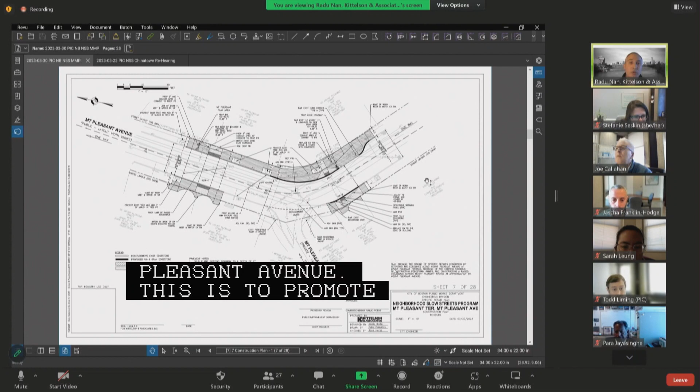At this location, we're proposing edgeline realignments, sidewalk reconstructions, pedestrian ramp reconstructions, and the installation of a raised crosswalk just north of Mount Pleasant Terrace across Mount Pleasant Avenue. This is to promote safe crossings right in front and at the entrance of Mount Pleasant Play Area, located east, or top of the page for you today. We're protecting some existing trees and relocating one street light with this improvement.

Are there any questions about this location, or I'll move on? I think we can just go through each of the locations and then we can jump back to their questions.

The second location is at the intersection of Moreland Street with Montrose Street and Fairland Street. This intersection is currently all-way stop controlled, and it's also an access to the House playground.

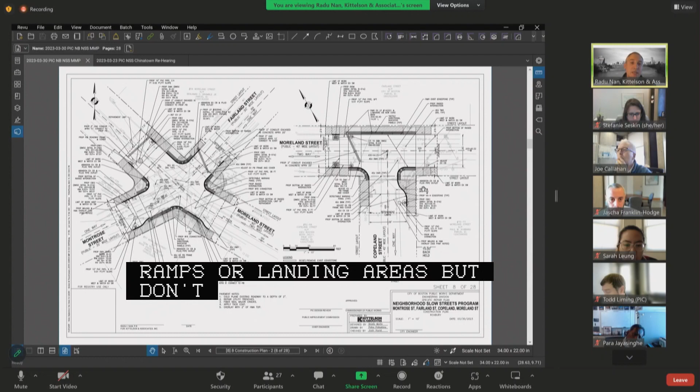The improvements displayed on the plans include realignment of edge lines along the street, reconstruction of pedestrian ramps or landing areas. The whole intersection, the center between these three streets, will be raised as a raised intersection to promote and reinforce the stop control at this location and make the access into the playground safer for the neighbors walking to that play area.

Additional improvements shown on the plan include relocated and new streetlights, new streetlight conduits, and new storm drain infrastructure along Moreland Street, Fairland Street, and Montrose Street. And that's about it for that location.

Just southeast of this location, we're also proposing raising the intersection at Moreland Street with Copeland Street. This again is an entrance into the House playground.

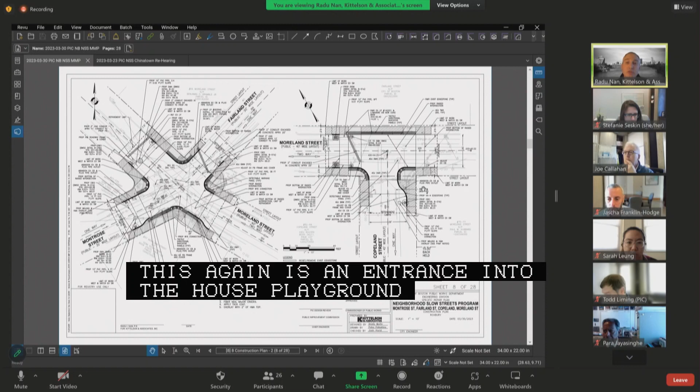The improvements at the intersection of Moreland and Copeland include realignment of the edge lines, reconstruction of sidewalks, reconstruction of the landing areas associated with the raised crosswalk, relocation of one street light, new conduit to allow for that relocation, and new storm drain infrastructure.

The next intersection where we're proposing work is at Copeland Street and Langford Park. The work includes reconstruction of sidewalks, reconstruction of pedestrian ramps, and the installation of a raised crosswalk across Copeland Street, just west of Langford Park. In addition to those pedestrian area reconstructions, plans show new storm drain infrastructure and relocation of streetlight conduits to allow for the storm drain work to be completed.

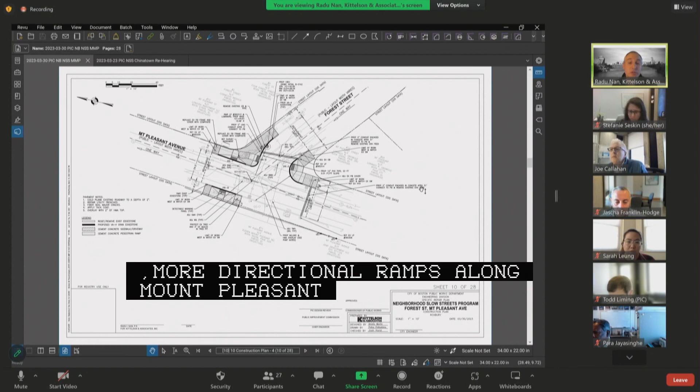The following location is at the intersection of Mount Pleasant Avenue and Forest Street. The repairs at this intersection include realignment of the edge lines to promote more directional, shortened crosswalks, more directional ramps along Mount Pleasant Avenue, reconstruction of sidewalks, reconstruction of pedestrian ramps, relocation of street lights, repairs to existing streetlight conduit across both Forest Street and Mount Pleasant Avenue, and one storm drain relocation to align with the new edge lines at this location.

The following area where we're proposing changes is along Mount Pleasant Avenue from Dudley Street to just west of Forest Street. The improvements shown on plan include realignment of the edge lines along Mount Pleasant Avenue and Forest Street, widening and reconstruction of sidewalks, reconstruction of pedestrian ramps, relocation of street lights, repairs to or addition of street lights and new underground conduits for those street lights, and new storm drain infrastructure to align with the new edge lines location.

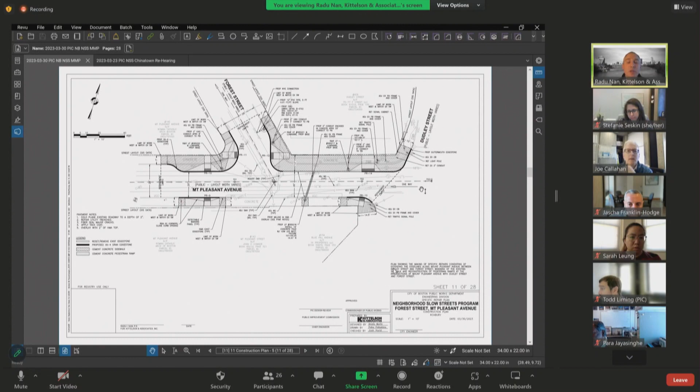I will note that the sidewalk area on the north side of Mount Pleasant Avenue between Dudley Street and Forest Street is being widened to also allow the installation of a Blue Bike station, which has currently been installed in the street. Widening the sidewalk would allow for that station to be located in a safer, easier to access area within the roadway.

So that's the general reason for the widening of the sidewalk between those two streets.

The last improvement we're proposing is along Dunreath Street, near the Lowell Scobie Playground. The repairs include work to the sidewalk and the installation of a raised crosswalk, generally between 16th and 18th on Dunreath, including sidewalk reconstruction and pavement work within the street area.

And those are all the changes we're proposing to the streets within this area. I'll entertain any questions.

Thank you very much. Commissioners?

Radu, can you just go back to the slide with Forest and Mount Pleasant? Forest and Mount Pleasant are two one-way streets, right, coming to each other? Forest leads away from Mount Pleasant, and Mount Pleasant leads away from Dudley Street. At this location, yes. Mount Pleasant and Forest intersect again, and in that case, Forest is coming into Mount Pleasant, and Mount Pleasant is going into Dudley Street. Awesome.

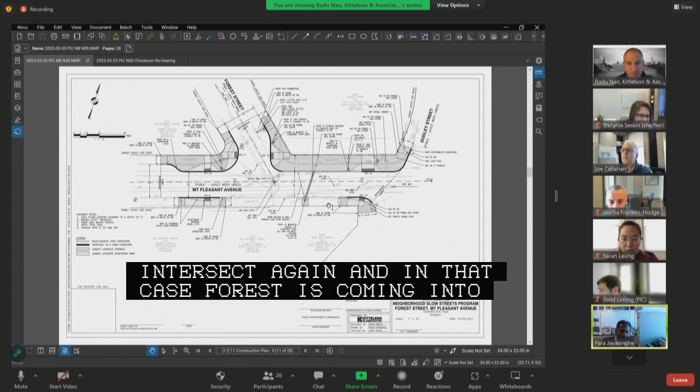Hey Radu, can you go to the key map, the very first one showing the whole neighborhood? This one, okay great. Radu, these are brilliant, exciting projects.

Do you have any sense of whether any of these roadways are close to being resurfaced or reconstructed by the Public Works Department? Because when we put in these speed bumps, it may delay things. Do you have a sense of the condition of the roadways, whether they're in a resurfacing program or a total reconstruction program?

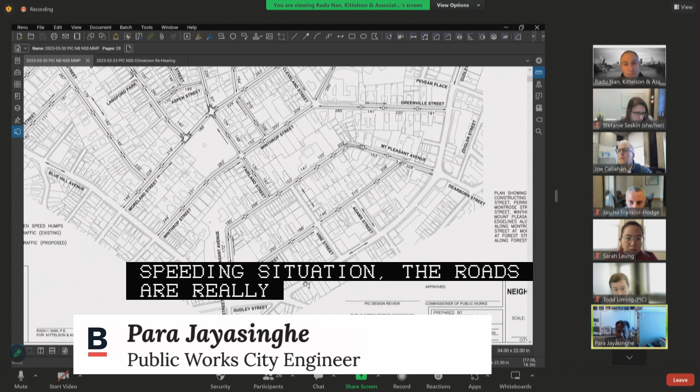These streets aren't on any maps for that. So the people have lived with a speeding situation, the roads are in a fairly decent condition, and this will make the neighborhood better for living, something like that. Yes? Mm-hmm. Awesome. Thank you so much, Radu, and Stefanie, as always.

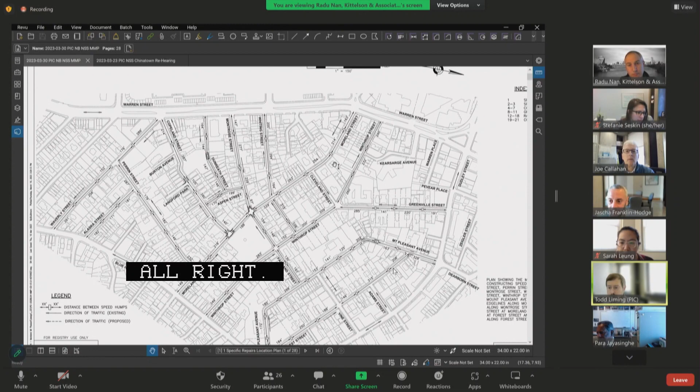Any other comments or questions, PIC staff, public? Can you just add the Blue Bike Station to these plans? Just add a notation so we can see where that's going. Will do. Thank you.

All right, so we'll be ready for your public hearing in 2 weeks on April 13th. We will be. Excellent, well thank you very much. Very exciting project, and we'll see you back in 2 weeks.

Thank you. On to new business, item number 3: 450 Commercial Street, Henchman Street, Boston proper, specific repairs, and a petition by Rocco's 450 Cucina Bar. Would the proponents please introduce themselves and their affiliations and let us know what you're proposing to do here?

Hi, I'm George Collins. Let me take a look at the plan. Hold on one second, I can't see the plan yet. No, we cannot see your screen. You can't see my screen? No. We need to hit the green share screen button at the bottom of the Zoom window and then select the window or the screen you want to share.

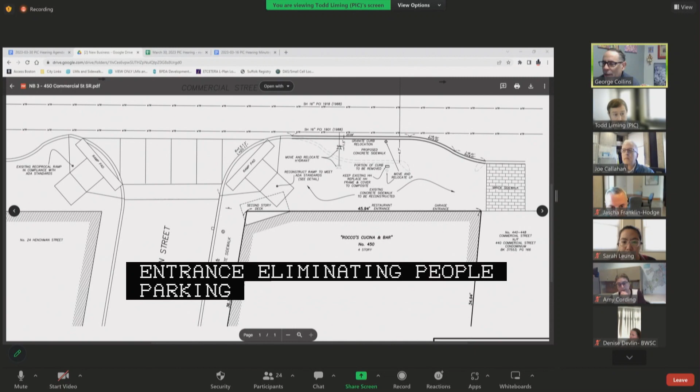Okay, now here's our plan. Yep, we got it. So what we're planning to do is move the curb cut in alignment with the corner of the roadway where it comes down Henchman. In one place we have a curb cut that no longer goes into a garage, since the garage entrance is gone and is now part of the restaurant, so we want to get rid of that curb cut. Then there's another part of the curb where the fire hydrant is, so there's basically no parking spot there because you'd be parking in front of a fire hydrant. So when you come down Henchman, we want to realign the curb straight and then curve back in after the restaurant entrance, eliminating people parking in front of the fire hydrant, which they've been doing, and eliminating confusion about the curb cut since there's no garage there anymore. We just want to make the curb straight and keep a straight alignment.

And we plan on redoing the handicap ramp, reconstructing it to new ADA standards. It's there, but it's not currently to new ADA standards. We're relocating the hydrant to the curb, and we're relocating the light pole to the curb. Both the hydrant has been looked at by Boston Water and Sewer, and the light pole has been looked at by the lighting department, and both approved the relocation of both of those.

Excellent. Commissioners, questions, comments? PIC staff, members of the public, questions or comments? I think we're all set here. All right. Hearing no other comments or questions, will you be ready for your public hearing on April 13th? Yes, I will. All right, we will see you then.

On to new business item 4, 80 Atlantic Avenue, Boston proper, projection license on a petition by M. Cook Incorporated. Would the petitioners please introduce themselves, their affiliations, and talk us through what you're proposing to do?

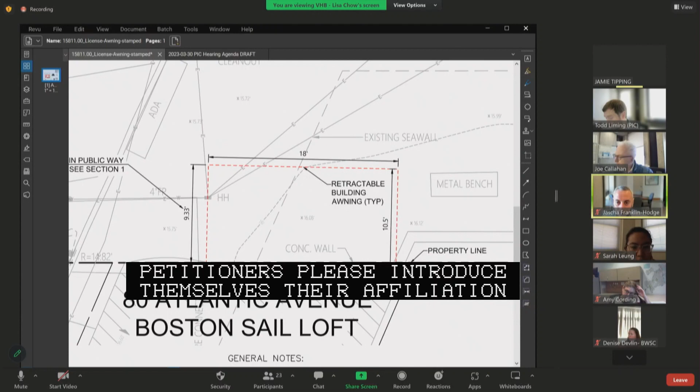Jamie Tipping, Boston Sail Loft. Good morning, members of the commission. My name is Lisa Chow with VHB. I am joined by Jamie Tipping with the Boston Sail Loft, Meredith Tipping with the Boston Sail Loft, as well as Tom Miller from McDermott, Miller and Quilty. On behalf of the applicant, we are requesting approval of an awning license on Atlantic Avenue for the Boston Sail Loft restaurant located at 80 Atlantic Ave.

Let me just make sure that you can see the plan before you. Can you? Yes, we can see. Okay, great. Yep, thank you so much. So the proposed awning is approximately 18 feet long by 10.5 feet in depth, and the minimum vertical clearance underneath the awning is 10 feet. Oops, can you still see? Yes. Okay, great. Sorry about that.

The project team has coordinated with PIC staff and the Commission for Persons with Disabilities and incorporated those comments into the plan before you. Just to recap, the proposed awning does occupy less than two-thirds of the existing sidewalk. We did circulate the proposed plans as well as an engineering report to the required city agencies and utility companies as part of the PIC notification process. Are there any questions at this time?

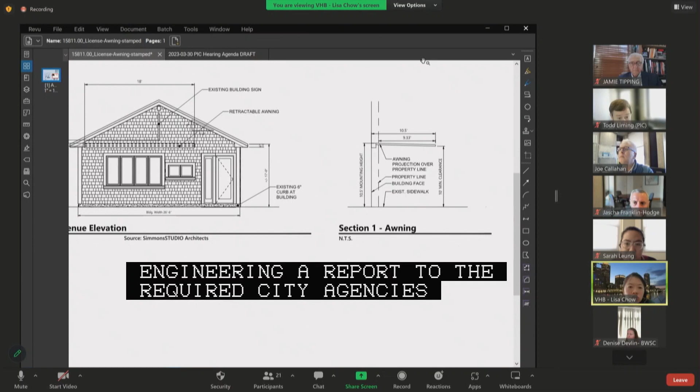Yeah, Lisa, just a quick question. I don't want to trouble your designer too much, but your testimony says the extension of your awning is not more than two-thirds of the width of the sidewalk, but your plans are not to scale. So if you could clarify something on a plan view so that we can keep an official record of the current width of the sidewalk and how far the awning is coming out, Mr. Liming can assist you with those details. Okay, we can clarify that. But just so you know, the sidewalk from curb to curb is about 40 feet, and the two-thirds is exclusive of the bike lane, but we can clarify the scale. Thank you.

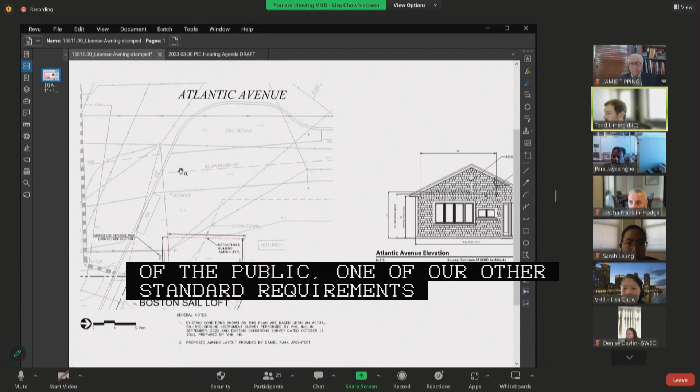Commissioners, other questions, comments? PIC staff, members of the public? One of our other standard requirements has to do with addressing rainwater and snow and ice falling from these types of building projections. My understanding is that this awning is retractable, so it won't be out during inclement weather. Can you confirm that, Lisa? That is correct, the awning is proposed to be retractable. Thank you, so you're not going to have it open in rain? Yeah, I was just going to ask that. Well, it's retractable, but Jamie, I don't know if you want to address whether or not it will be deployed during rain events.

Yeah, the way the awning will be constructed, it's electronic, and there are three ways that it retracts. One, if a gust of wind comes along and reaches a certain point, it automatically retracts. I also have a remote that will retract it. And if for whatever reason we have a power outage, we have a crank that allows us to do it manually to bring it back. So it is definitely retractable in three different ways.

I think the question is, this is covering your outdoor dining, right? So presumably if it's raining, you would have your awning out and it would be sheeting the rain onto the sidewalk. That is correct. There is a slope to the awning itself, it is pitched, so water wouldn't be ponding on top of it, if that was the question you were alluding to. Pitched to where? To the front, towards Atlantic, towards the street. Yeah, no, I guess it's just that that's the sidewalk, so if I'm walking along the sidewalk, I'm walking along the sheet of water that is falling off this canopy.

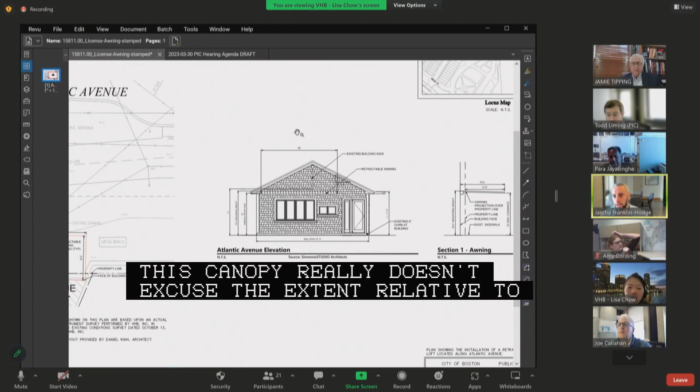Where does the extent of the awning relate to the extent of your sidewalk cafe or outdoor dining setup? I think the question is, where's the water falling? So it's not falling onto pedestrians - the extent of the awning is in line with the extent of the sidewalk cafe limits, so it's not falling onto pedestrians walking in the clear zone.

The sidewalk, from the edge of the red line to the bike path, is approximately 10 feet. Yes.

I think the concern is that we don't allow the sheeting of water, where that water then sheets across the sidewalk. The internal draining is meant to prevent the volume of water from having to flow either on pedestrians or across the sidewalk.

Well, right now, when it rains without the awning, where does the water go? I think this is about gathering water and then it's sheeting down to what is now the edge of the sidewalk, right? If you're on the sidewalk and it's just raining, it's gonna be raining - it's just a matter of fairness. The rule has more to do with the fact that sheeting water when it freezes is a much bigger problem. But if you're a pedestrian, I think it's just to know that we don't have a waterfall in the middle of the sidewalk, and also any concerns with the addition of all that water going across the sidewalk.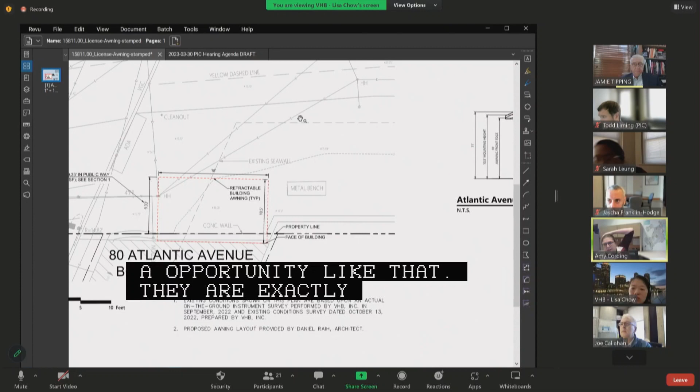I guess then, is it possible to pitch it so that it goes to that corner? Because it would fall basically right into that catch basin if you're on - you're referring to right here, yep.

Well, I don't know, I'd have to talk to the awning company about that - let me talk to the awning company, I guess. I don't know how much rain we're talking about as far as if it pitches forward, and whether it pitches forward and then takes up, as we're looking at the aerial view, to the left, or if it pitches everything to the left. To me it seems feasible, but I'll look into the awning company for you if you'd like.

I understand what you're saying about pedestrians walking in front, but I want to emphasize that there is a 10-foot walkway between the bike path and the space we're taking up for the awning and outside seating.

So Amy, we'll revisit this with the awning company. As we mentioned, the edge of the awning is intended to be within the limits of the proposed outdoor dining cafe, so it wouldn't be falling onto pedestrians, but we understand your question and comment.

I think, to Para's point, dimensioning out the width of the clear sidewalk as well as the width of the clear bike lane might be helpful in demonstrating that - the clear path of travel. Yep, we can add those dimensions.

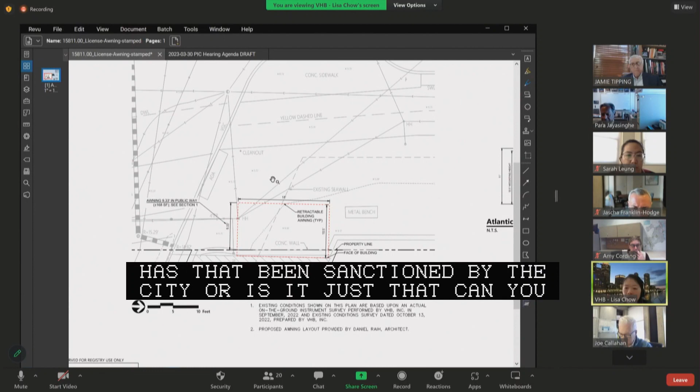Yeah, we can provide a quick answer, and then Jamie can add to it. So what you see in Google Maps is temporary outdoor dining that was approved by the city of Boston, and Jamie and the restaurant - no.

Sorry Jamie, I'm not allowing you to respond, but there's a method to my madness. Lisa, you're using the phrase 'there's an outdoor dining element' that is in need of what I call a roof, which is retractable. So there's a bit of confusion as to whether the awning is retractable. Todd, if it is retractable, is it a PIC element, or do we consider that separately? Irrespective, it would be good for you to give us some idea where your permanent cafe is going to be.

The outdoor cafe, are you planning on making that permanent? Yes. Awesome, so give us some idea to connect the dots as to the awning - think of it like a huge umbrella. And Todd, let us know whether this is PIC material in terms of it being retractable, because let's assume we sanction the outdoor cafe and they put a whole bunch of very tall, very fat umbrellas - would that go through the same process about water drainage and all that?

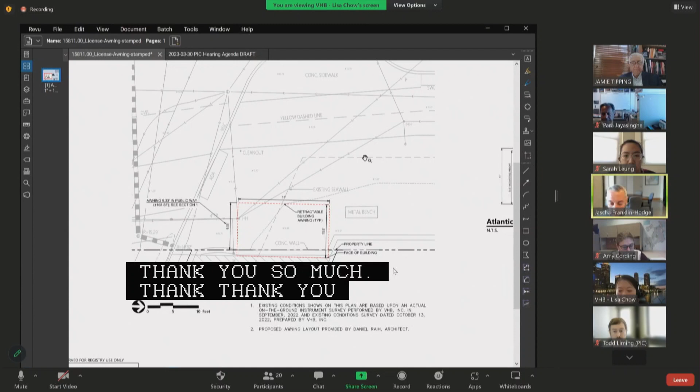Okay, we'll work through that with the team in the next two weeks. Awesome, thank you so much. All right, any other questions or comments from commissioners, PIC staff, or the public? All set. All right, excellent. It sounds like you'll be ready for April 13th. We will be, yes. Well, thank you very much for your time. I appreciate everybody.

All right, on to new business, item number 5, Charter Street at 1 Michelangelo Street, Boston proper, granted location on a petition by Cambridge Network Solutions. Would the proponents please introduce themselves, their affiliations, and give an overview of what is being proposed here?

Good morning, my name is Thomas Agresta from Sienna Engineering Group. I'm joined by Erica Hudson from Sienna as well. Can everyone see my screen? Okay excellent, yes we can. So Cambridge Network Solutions is seeking a grant of location to install a conduit along Charter Street. As you can see here, there's a proposed breakout of an electric manhole at Commercial and Charter, installing one 4-inch Schedule 40 PVC conduit along with 4 city shadow to a proposed new handhole that's going to be in the furnishing zone.

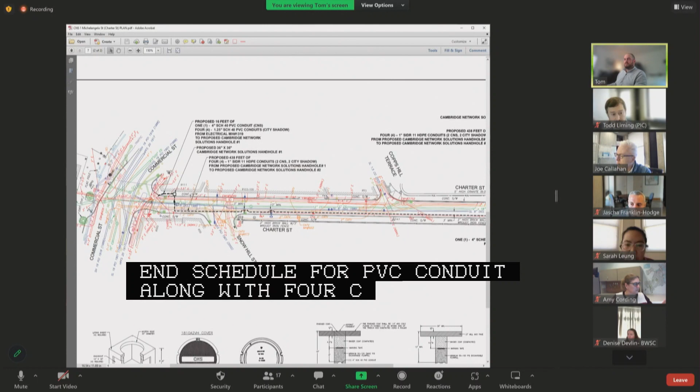Then there will be 4 1-inch conduits that will run along Charter Street down to about where Jackson Ave intersects, to another handhole that will be in the roadway. This will be a road-rated handhole. And then from this handhole, there will be one 4-inch Schedule 40 PVC that will go into 1 Michelangelo, which is where the customer we are trying to serve is located. All conditions of the roadway and sidewalk will be restored to their previous condition or better. If there are any questions, I will take them at this time.

Commissioners? Do I see staff or members of the public? All set? All right, you'll be ready for your public hearing in 2 weeks on April 13th. We will be ready. All right, we'll see you on that agenda, and on to new business number 6.

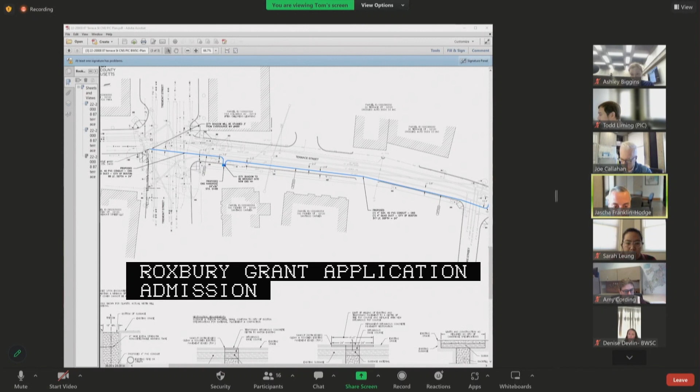Terrace Street, Tremont Street, Roxbury, granted location on a petition by Cambridge Network Solutions. Would the petitioners please reintroduce themselves and give us an overview of what you are proposing here? Good morning everyone, my name is Tom Agresta from Sienna Engineering Group. I am joined by Erica Hudson from Sienna Engineering Group as well. Cambridge Network Solutions is seeking a granted location for the installation of a proposed handhole and conduit within the city right-of-way. Can everyone see my screen? We can. Excellent. This proposed installation starts at an Eversource manhole at the intersection of Tremont Street and Gurney Street.

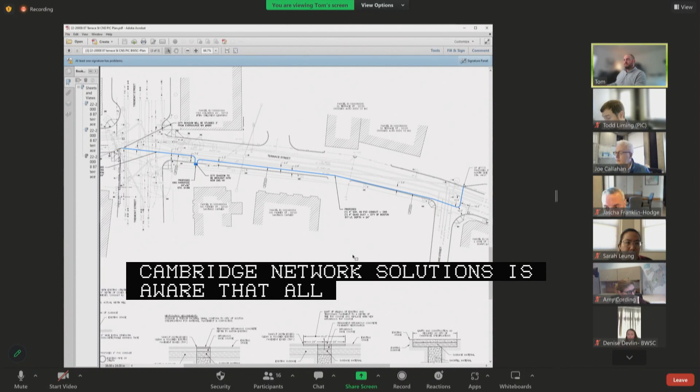From there, there'll be an installation of one 4-inch Schedule 40 along with a quad duct city shadow to a proposed handhole that will be installed in the furnishing zone on Terrace Street. And then from there, there'll be one 4-inch Schedule 40 PVC conduit and one city shadow installed along Terrace Street to utility pole 77/3, where a riser will be placed and the conduit will rise up on that pole. Cambridge Network Solutions is aware that all existing conditions must be restored to previous condition or better, so we'll make sure that occurs. If anyone has any questions, I'll take them at this time.

I believe, though I'm not 100% certain on the extent, that portion of Tremont Street you're proposing to cut was just repaved last fall. Can you give a little more clarity on when you say restoration to existing conditions or better, how you intend to handle that nice, smooth, freshly paved road as you cut into it?

Yeah, as you said, if it's a newly paved surface, then matching the existing grade and making sure everything is sealed up to city spec, so that no cracks form, would be our highest priority. Our goal would be to leave one smooth, continuous surface.

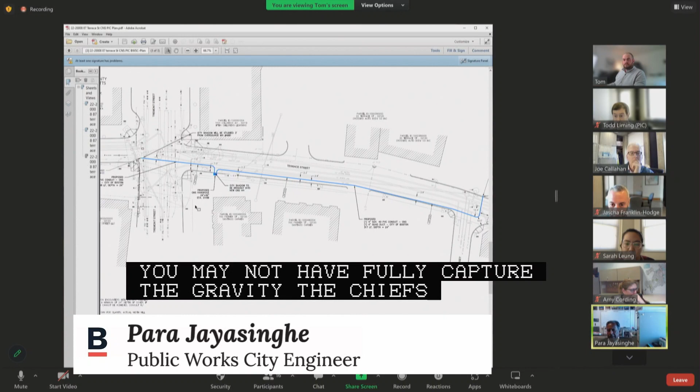Tom, I think it's possible you may not have fully captured the gravity of the chief's thought there, so I'll ask it in a more binary way. Is Tremont Street a guaranteed street? Did you check to see if it is guaranteed, meaning we've resurfaced it, we've invested millions of dollars, and we really don't look favorably on someone chopping it up?

That is the question being asked. When you cut a new street, there's not much you can do to compact it and make the necessary repairs to meet the condition of a brand new investment costing millions. So would you like to respond again to the chief's question, please?

Yeah, absolutely. I'll look into whether it's a guaranteed street, and if it is, we'll look into any possible restoration methods to ensure the city's investment is not ruined.

Awesome. Second question, Tom — I missed this part, I'm sorry. How many conduits are you putting in? The entire length of the installation will consist of one Schedule 40 4-inch PVC and then a quad duct city shadow.

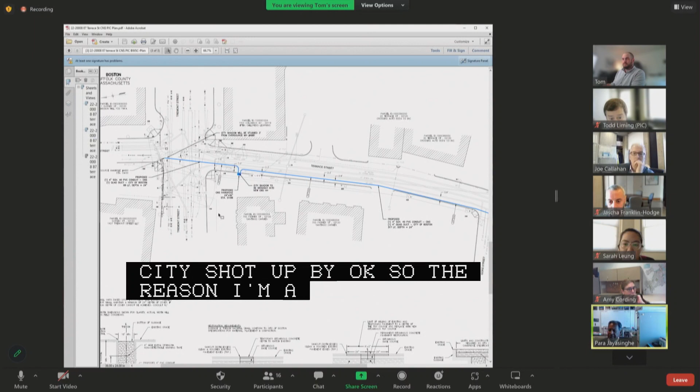The reason I'm asking is that on Terrace Street, we are planning to invest, and there are enough utility poles with a lot of wires above ground. Was there any reason you were not attaching your limited amount of wires to the overhead structure rather than adding new conduit? Just curious, not a big deal.

No, that's always a consideration. Sometimes the poles are in such condition that doesn't allow for new aerial attachment. So there was a space issue or a strength issue with the existing pole situation. Correct, and the engineers figured out it's more economical this way. Got it, never mind, thank you, sir.

Commissioners, other questions or comments? I see staff or members of the public — all set. Alright, hearing nothing else, will you be ready for your public hearing on April 13th? Yes, we will. Alright, we'll see you back then. Thank you very much, everybody.

And on to our last item, new business number 7, Washington Street, West Roxbury, grant of location on a petition by Extenet Systems Incorporated. Would the proponents please introduce themselves, their affiliations, and let us know what you are proposing to do.

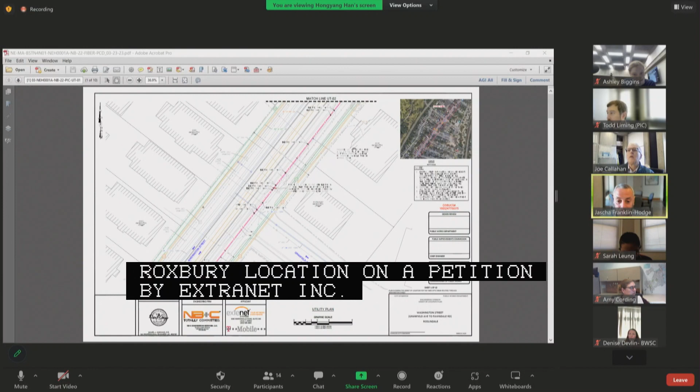If somebody is speaking, we're not able to hear you, you are muted. Oh, there we go, sorry, I'll start over. This is Keenan Brinn from Extenet Systems, the applicant. I'm joined by Han from NB&C Engineering, who prepared the plans.

This application requests permission to install a 4-inch PVC conduit fiber duct along city streets, including city shadow duct. The fiber run is approximately 1,835 linear feet along Washington Street between Granfield Road and Fawndale Road in the neighborhood of Roslindale. There is one small spur near the intersection of Whipple Street. Other than that, it's a straight line along Washington Street through Roslindale.

As is customary, Extenet will install city shadow conduit and also coordinate with the city and businesses prior to and during construction to minimize traffic concerns. During our application process we didn't encounter any particular concerns, but we're happy to take any questions you may have and try to answer those. Thank you.

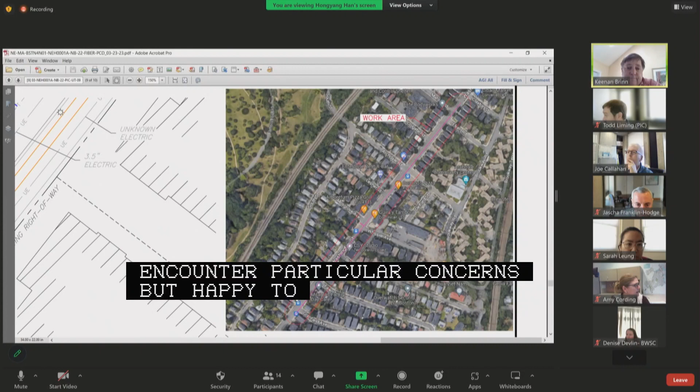Commissioners? Sorry. Are any of these cuts going to impact — I'm just trying to get my head straight as to your location in terms of the bus corridor we put on Washington Street. Chief, is this within that zone, or I'm just not quite sure where he's going to chop up? It is. Okay, sorry, I'm sure Amy can take it from here.

Is there a question there? Yeah, sorry, Keenan. The city made a huge investment in putting a transit lane over here. I think you may want to make sure that your cut is not impacting that, or while you are doing this, it's not going to impact traffic and all of that good stuff.

Yep, and I think we encountered this once before, Para, and I know we dealt with it successfully, but I will make a note that we will either try to address it or make sure that I have an answer for you in 2 weeks.

I mean, ideally you stay out of the red paint, right? Because that's going to be a much larger issue for you to have to restore. Exactly. But then staying out of the red paint begins complications because you're clearly then killing our travel lane.

Yeah, I think the bigger issue is on the traffic maintenance plan. Correct, more than the construction itself. Yeah, but I'll make sure that we can address that.

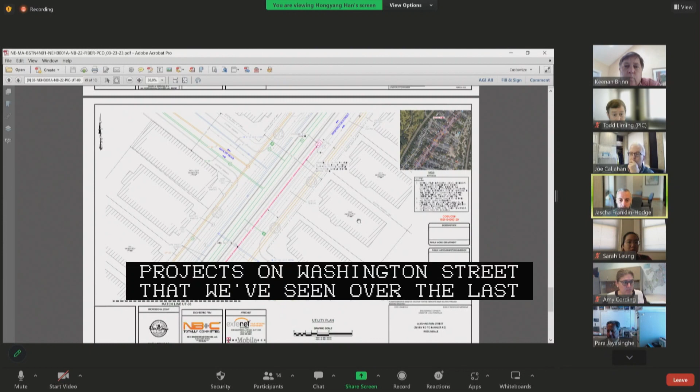Keenan, just building on this point, there's been quite a few lengthy projects on Washington Street that we've seen over the last year. I think it would be helpful, since this issue has come up in a few of your other hearings, to get an update from Extenet on the construction progress of the overall corridor. In particular, we would love to see some photographs or other documentation around the way the other aspects of the project, this contiguous stretch that we have approved, have been built and restored in the current condition, assuming they have in fact gone into construction.

And I think when we have a multi-stage project along such a long stretch of road with the potential to significantly impact crucial infrastructure like bus lanes and other types of transportation services, just getting us comfortable with the fact that the work done to date is meeting the standards we've asked you to meet in previous hearings would go a long way to helping us feel comfortable continuing to approve these expansions of this larger project.

Yeah, Mr. Commissioner, I think that's a legitimate concern, and I think that's a fair question. And I know we've had a lot of activity, either construction-wise or planned for construction. I'm going to look into this and just see if I can get you an update, and I'll make sure that our construction manager, Arthur Pino, is on the next call, and I'm happy to have him chime in as well.

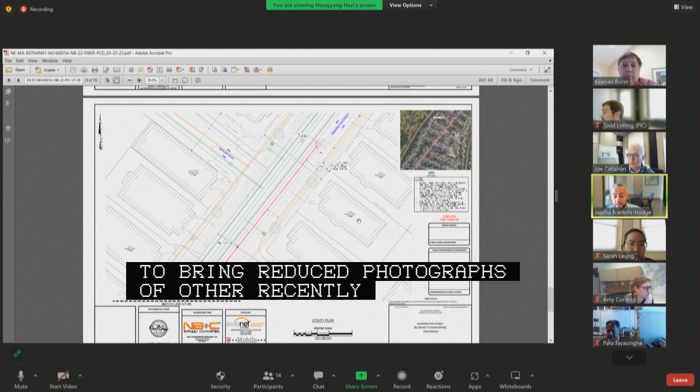All right, that would be great. And if you're able to bring with you some photographs of other recently completed projects on this corridor, assuming again that they have actually been constructed, and the nature of the restoration work you've done around pavement markings in particular, I think that would be very helpful for us to understand what it actually looks like when it's done, so we know that our residents will be getting something that isn't degraded from its current condition.

Yep, again, we've got a lot in the pipeline here, whether or not we've actually started a lot of these, but I think it's probably a pertinent question given that we're coming into the construction season. So I'll see what I can come up with in terms of photos, and then maybe try to give you a little bit of a progress report on the 13th, if that's the next scheduled hearing.

Yeah, that would be great. And even too, just helping us understand, it feels like this is adding up to a single contiguous corridor, but the projects are coming to us in stages. So even a brief update on what the overall vision is for this, I think is helpful for this commission to just know what's come, what it adds up to, and where it's likely to go. So, yeah, no question about that.

And that certainly would be a concern for the board. I know I've brought in multiple projects along this Washington Street corridor, and it might be a good thing to just look at it in its totality.